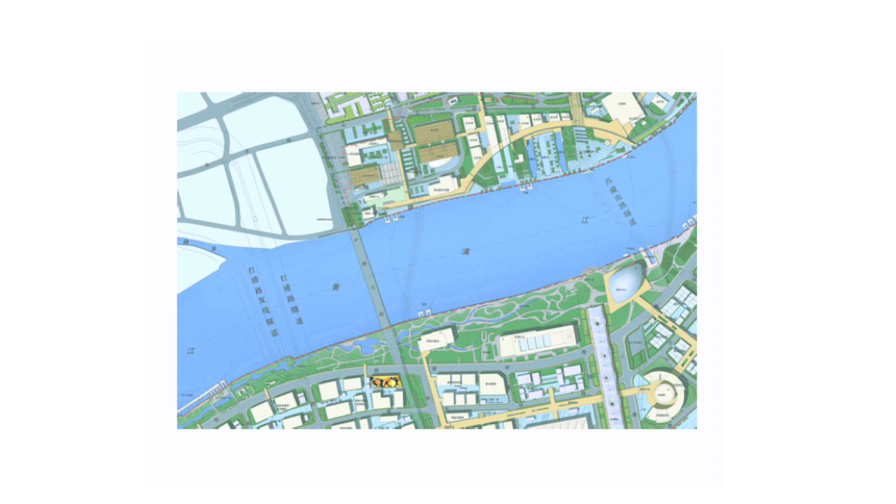Spain chose a spot just underneath one of the biggest bridges of Shanghai, the Lupu Bridge. In one of these small pieces of land, we had to do a pavilion which had to represent Spain in an expo which, for the first time in many years, would again be an expo of knowing each other. Because I think at the beginning of the expos in the last century, it was about discovering new capacity, new technologies, but here it was again a kind of meeting.

In China, in a place which was very curious about Europe and the rest of the world, and the rest of the world very curious about China, we had the task to explain Spain to a faraway country and to make it loved.

We decided, together with our team in the office - we have a very international team, people from all over the world, some of them are here right now - we started together to think about how to represent Spain. Most of us were not from Spain.

But we thought Spain was a fantastic place with a lot of energy, a lot of dynamism. We had a lot of topics on our table - flamenco dancers, the piazzas, the flowers, all these kinds of things. Then we took all the topics, threw them away, and substituted the building for a very dynamic geometry, deciding to introduce into the building a material which is handmade. In the past expos, there was always the use of a very traditional material from Spain becoming something else.

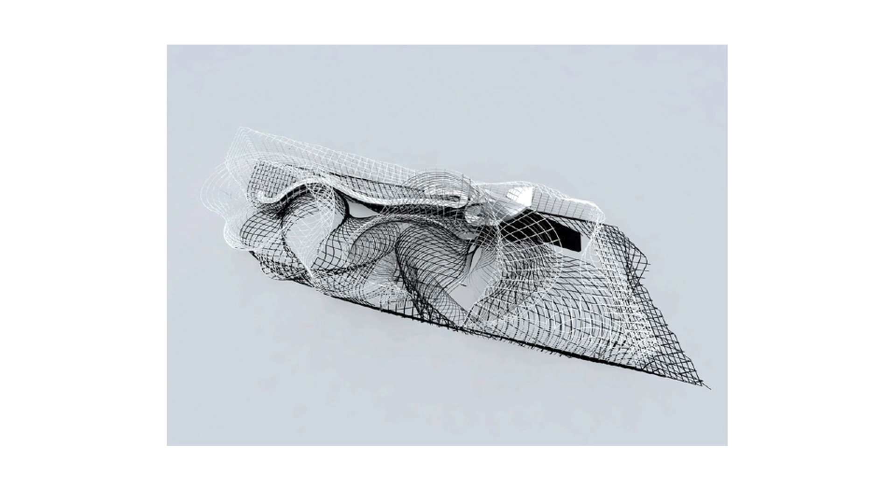But anyway, we thought that for sure we had to try to use something we could control a little bit. The geometry was very complex, but we could control it with this metal technique and with metal tubes, in a kind of net, a big net of metal tubes.

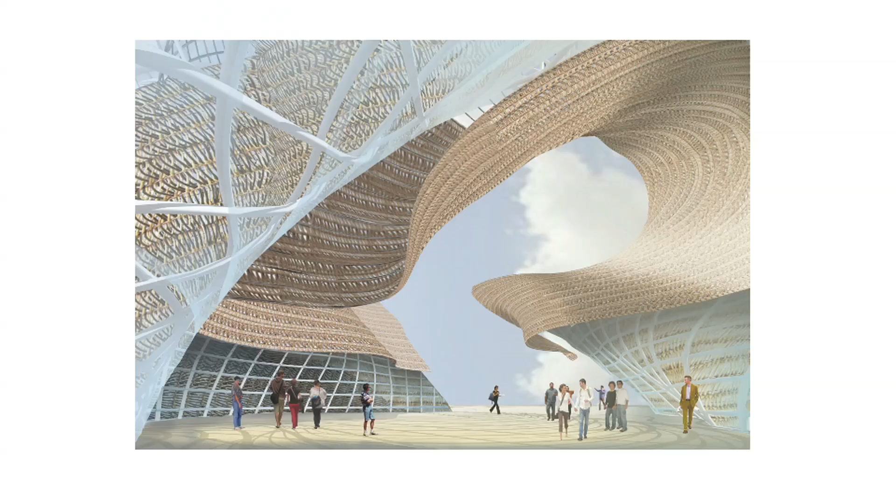Also, we had a fantastic structural engineer who is a friend, called Julio Martinez Calzón, and he's passionate about China, so it was a kind of double adventure.

We had this pavilion which would have a structure of metal tubes and a dress which would be done by hand. So we were thinking about the two things at the same time. On the metal tube structures, Julio had the ability to help us, and on the dress, of course, we had to be ourselves.

We were talking with artisans, but at the same time we were also looking at fantastic people like Miyake, who design dresses, and we were trying really to design a dress. And we did it inside our office.

Our office is one which also uses the hands very much. You see here, there's a very big place where we produce models - a little like you do, but maybe you have more machines to produce models. We are still very, very artisan, very handmade.

So we started to think about how to make this wonderful dress with every means we had in our hands. We were trying to understand how this skin could be kind of three-dimensional - we didn't want a flat skin, a flat dress on top of the geometry of the tubes.

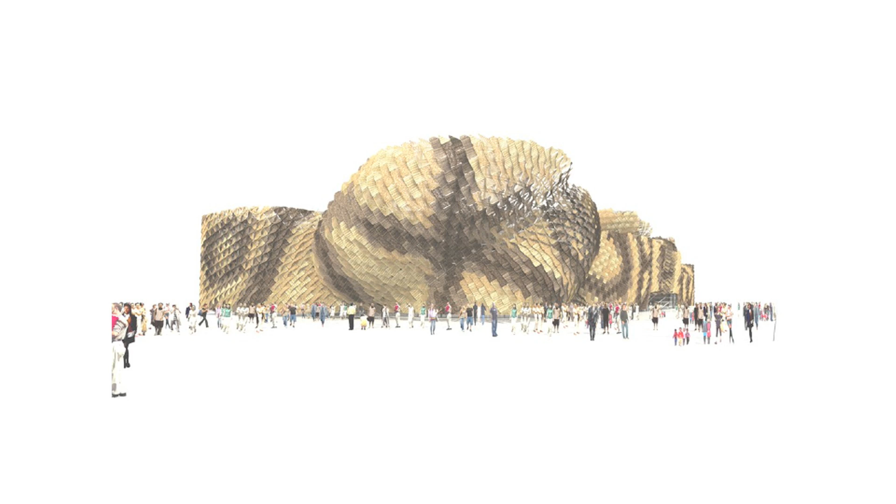When the Chinese people received the news that there was a kind of message on top of the facade, they became very angry, saying it's impossible to read it. And we were saying, okay, it's impossible to read it, maybe it's much better, because then you have the possibility to let the elements read it. So the sun, the wind, the rain will read it little by little and will change the facade during the 6 months of the expo.

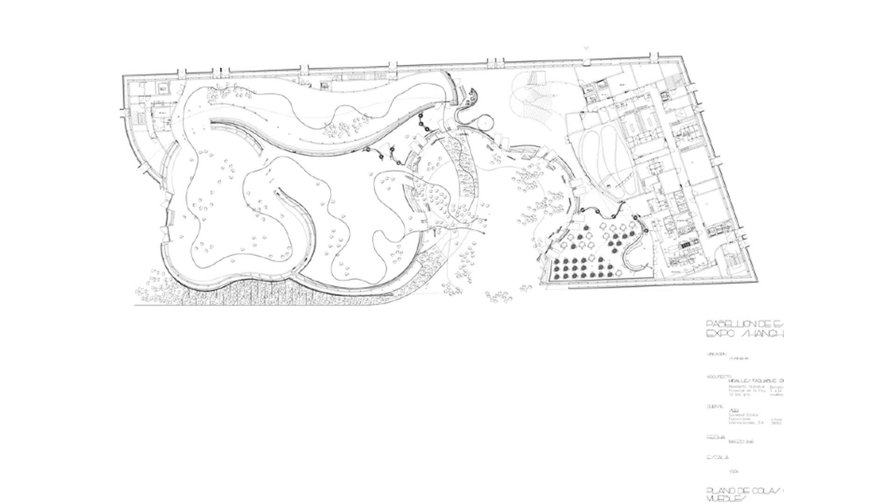And another wonderful material which we had to deal with was the people. Here you see finally the plan of the Spanish pavilion. The center of the pavilion is an empty space, a piazza, and from the piazza everything is happening. So these are the thousands of people lining every day, and the fluxes of people dividing, going inside into the exhibition, going outside, and then dividing more in the piazza, with possibilities to enter into the restaurant, the auditorium, the many offices that were there.

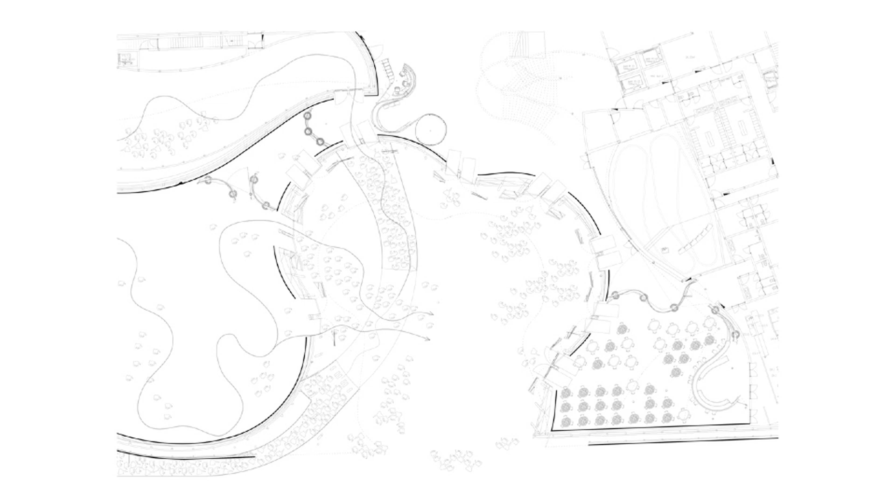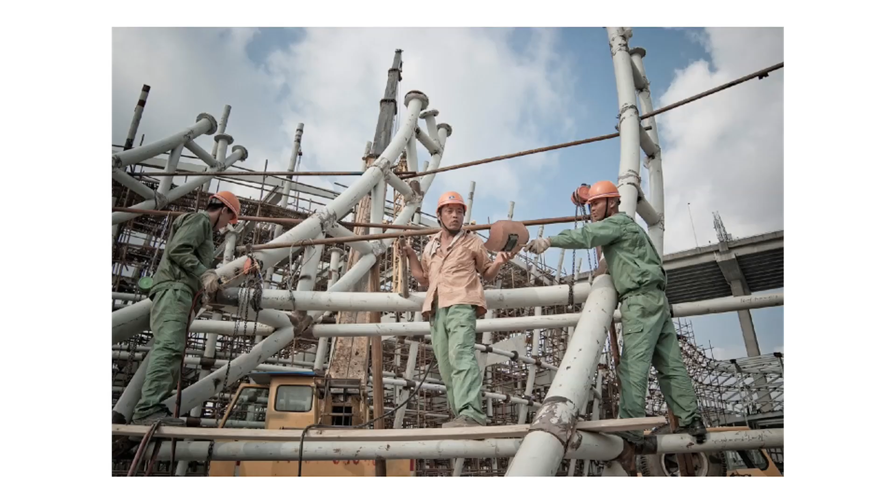The inside of the Spanish pavilion is a kind of flow, a continuous space flowing all around. But we had to divide the flow of people, so we decided to make furniture very similar to the geometry of the pavilion itself, which would not completely divide the building. It makes a division of people but lets the vision go through. We decided to use more natural material for these interior partitions, compressed bamboo, because bamboo is very Chinese, and we decided to be very Chinese, at least on the inside.

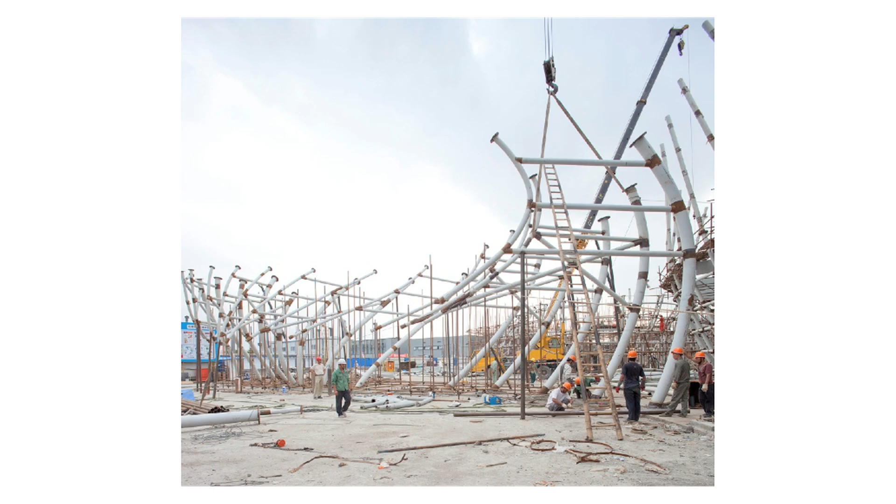Then the building side was a very fantastic adventure to us, really. It was discovering something very unknown. You have to imagine that at the beginning we were doubting, especially the client, about the Chinese capacity of building such complex geometry, that they were imagining building all the pieces in Spain and transporting them to China. Of course this was absolutely absurd.

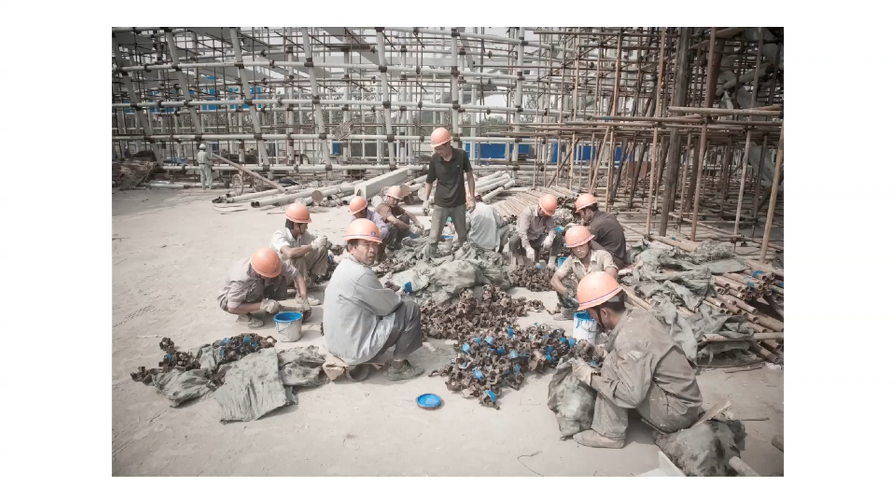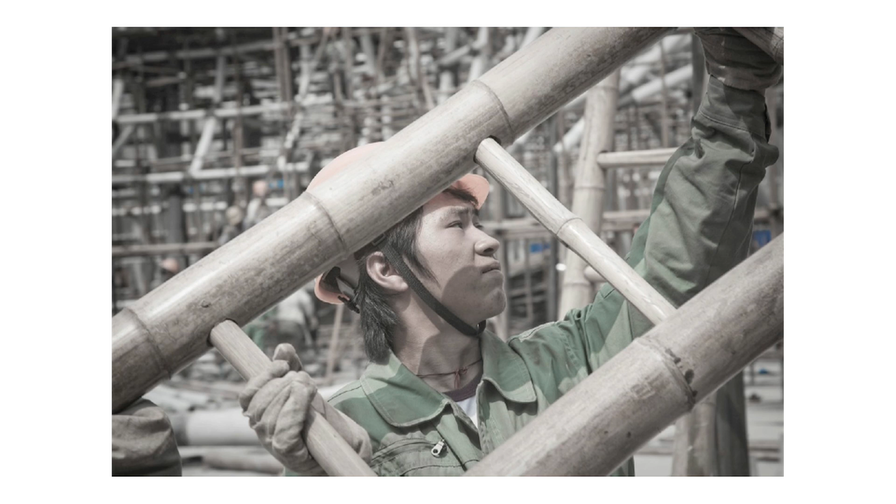When a little information entered into our knowledge, we understood that China was perfectly able to understand our drawings, to reproduce them with the same computer programs, to cut them, and also to understand the technique of how to assemble this very complex geometry, which you really have to assemble with a lot of care, considering also the deformation of the material. And what I loved more was this kind of images, how

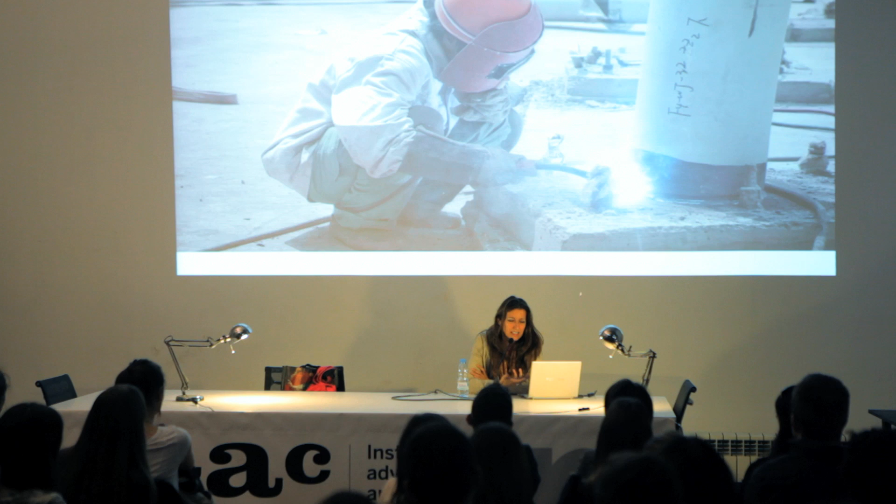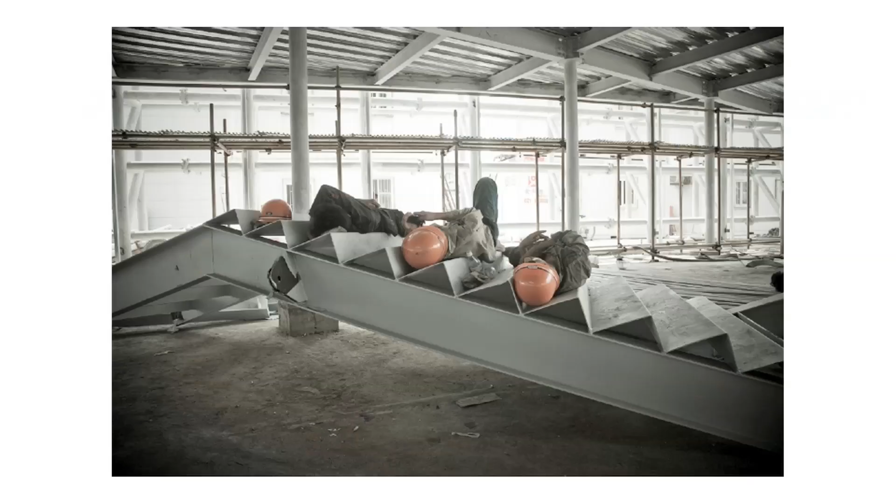artisan are the people who build also very big buildings in China. For example, here we have this bamboo ladder, but also everybody is using very easy tools, and for example the scaffolding is also bamboo, nearly the same thing that we were putting on the facade, let's say. And these capacities, I think it's really very nice, because this made me understand, going to a very far away country, that more than the differences, what interests me is the same things.

Humanity is so much the same everywhere. We all do a siesta, the workers work also in the same way. And for example, going back to wicker, this intuition that we had that wicker was worked in the same way in Spain and in China, here we had the alive proof, in this place — I'm sorry, my computer is very old.

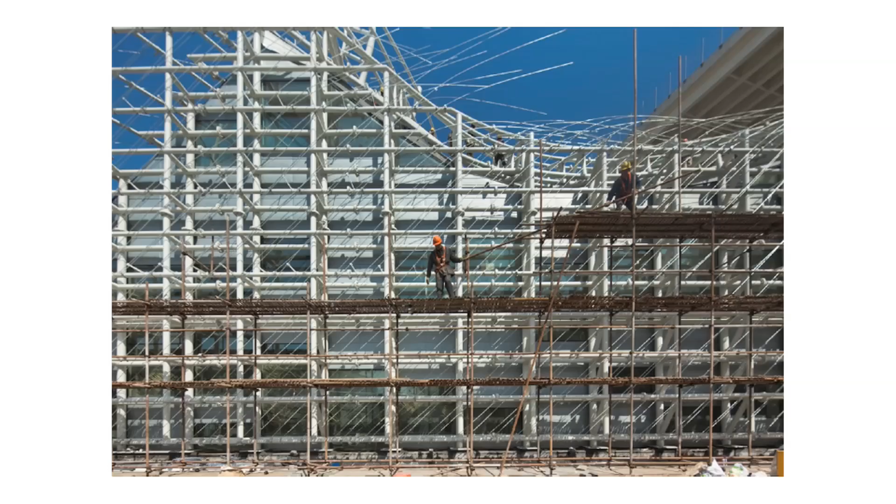And then the panels were arriving here to the building site. The building site is more complex. Here we already had the possibility to put the glass in the middle of the double layer structure, and also some of the opaque panels. And these lines that you see, this kind of hair, are in fact the secondary structure which is waiting for the panels to arrive on site.

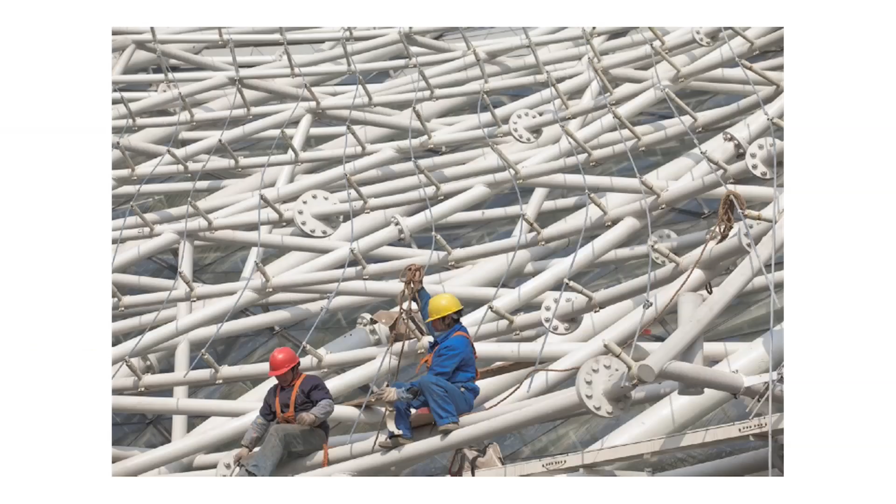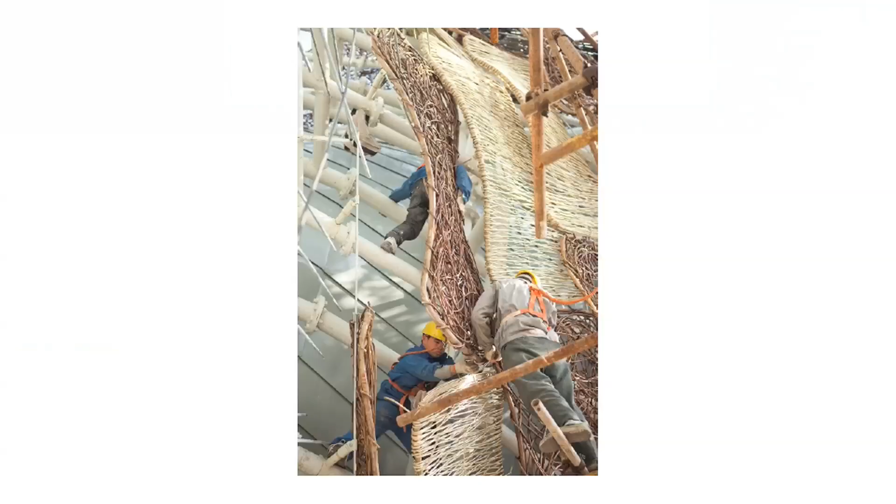What I love more of this image is that you see the panels are so similar to what's used in the real scaffolding of a Chinese normal site. So it was not a very big change. Trying to come from this moment where the scaffolding is there to this moment where something very similar to the scaffolding is going on top of the structure and becomes the facade.

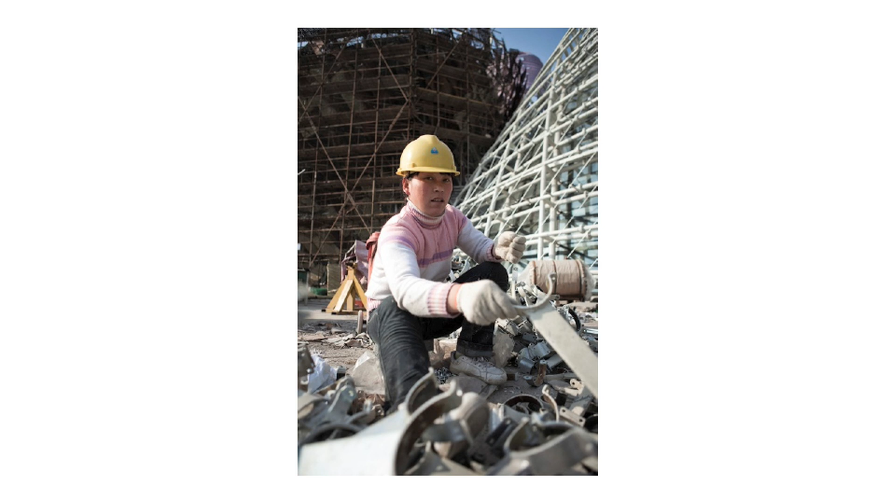Actually, each one of the panels was numbered, each one had a little label, because we were reproducing this very big drawing, this very big calligraphy. It was a mystery until about one month before the opening of the expo how this would actually be in reality. So this image is very important to me.

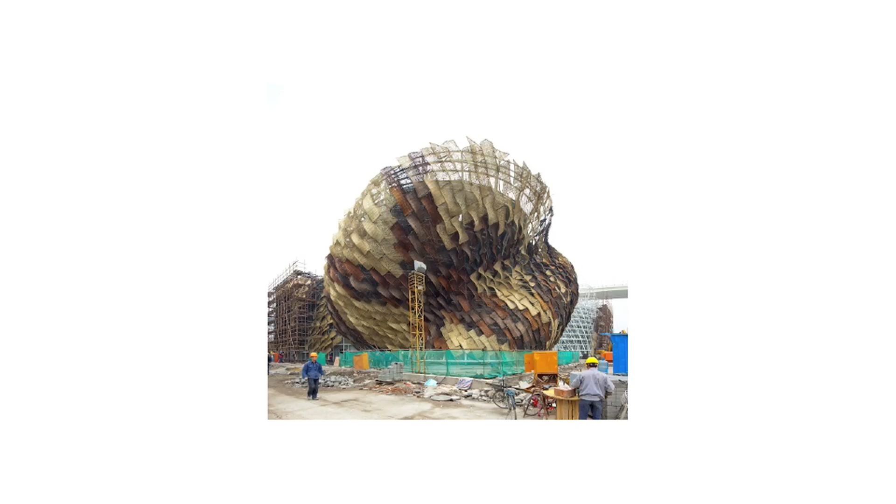The image before was the scaffold still there - I knew everything was going on, but I didn't know how it would look. And here, suddenly, we became more relaxed, because we said, oh, it's very strange, it looks like a render, but it looks better. So luckily, it's becoming something special, something different, something very similar to what we had been thinking, but in scale 1-to-1, this is becoming true.

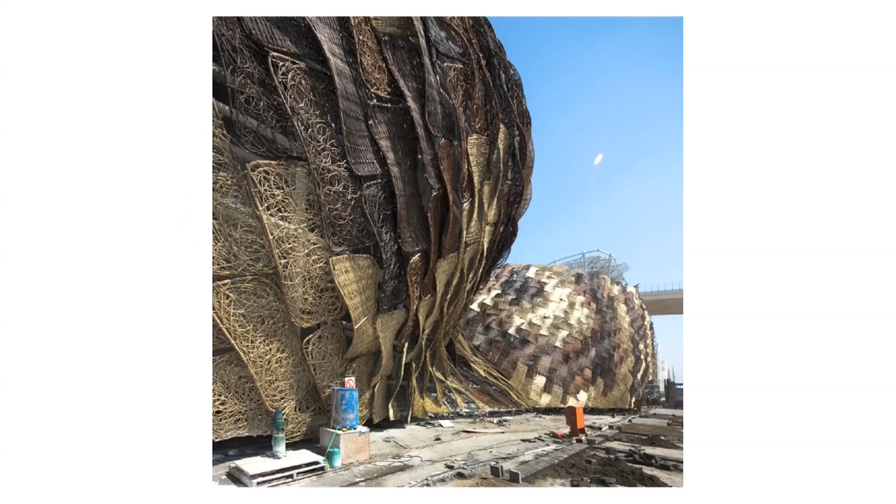It was as if finally this pavilion was becoming alive, becoming like an animal. So in a way, from that moment on, we were approaching our pavilion as if it was an animal that you know, that is domestic, that you love very much, but which has a life of its own.

And also the life was transmitting maybe to many of the people there. Because the people liked things, for example, like the smell of the pavilion. The pavilion had a very, very lovely smell, because with the sun and with the heat, and also with the rain, the smell was arriving, in a very, very artificial place like an expo.

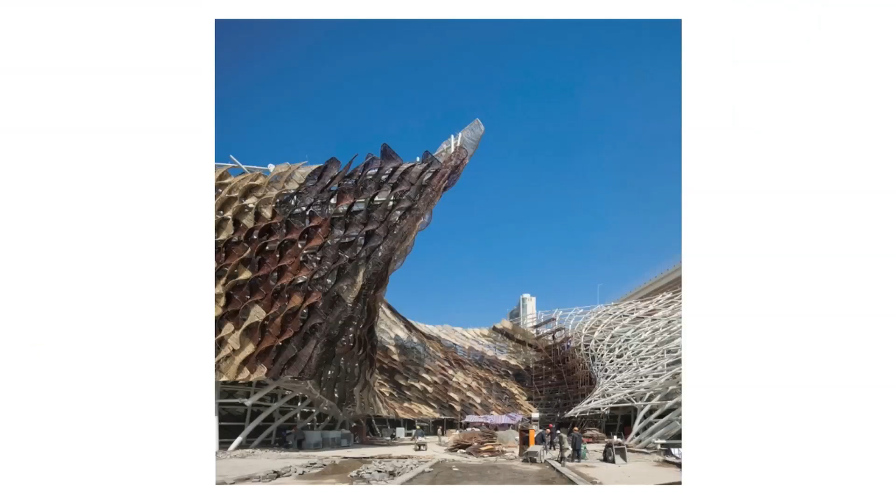This was a kind of a natural site. In a way, we usually work with the surroundings, and we like very much to mingle the buildings and the landscape. Here it was impossible, because there was no landscape in the expo. It was a very, very artificial site. But the wicker itself was working as a kind of a natural place, and also probably the geometry of the building itself.

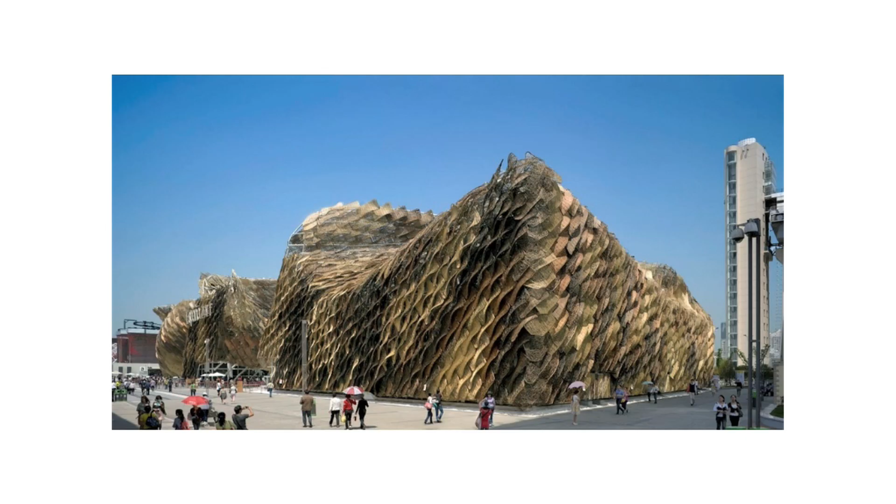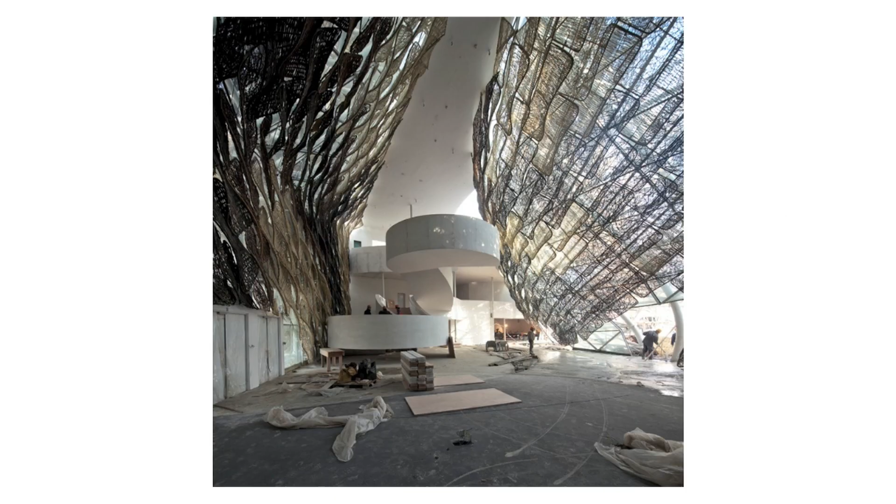It was like entering into a wood, or into the inside of an animal, or a forest - a place which is always different and always surprising you, but it's also giving a kind of cozy feeling. You like to be inside, and you like to get near to this living being, to this strange being.

So on the inside, there was this transparency that we were thinking from the beginning. We were really looking for this kind of light coming through this natural material and becoming like light through a wood. You don't have very much sun in Shanghai, but when the sun was clear, you had the shadows casting into the inside of the building, becoming really something very, very special.

And all this furniture, or these pieces, were designed in order not to interrupt this flow of the geometry of the building of the pavilion. And also it was very nice. I think the exhibition was one of the best.

It was really by chance that two of my friends were selected to exhibit inside. One was Bigas Luna, who did a wonderful film with sound. And the other one was Isabel Coixet, who did this very big, 5 meters high little baby, representing the future of Spain. So it was very lovely.

She's a filmmaker, but she refused to transform the room into a dark room for projecting films, and she used the same light to make her intervention the important one. So it was, in a way, like the big baby in the cradle.

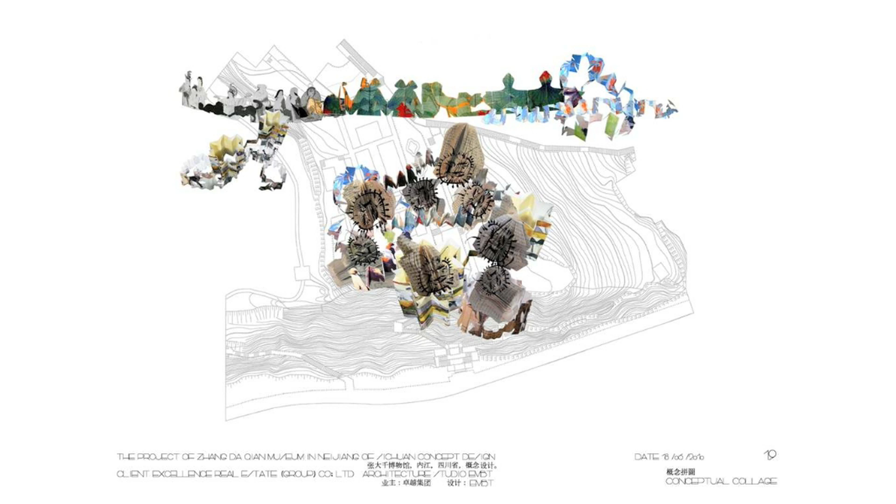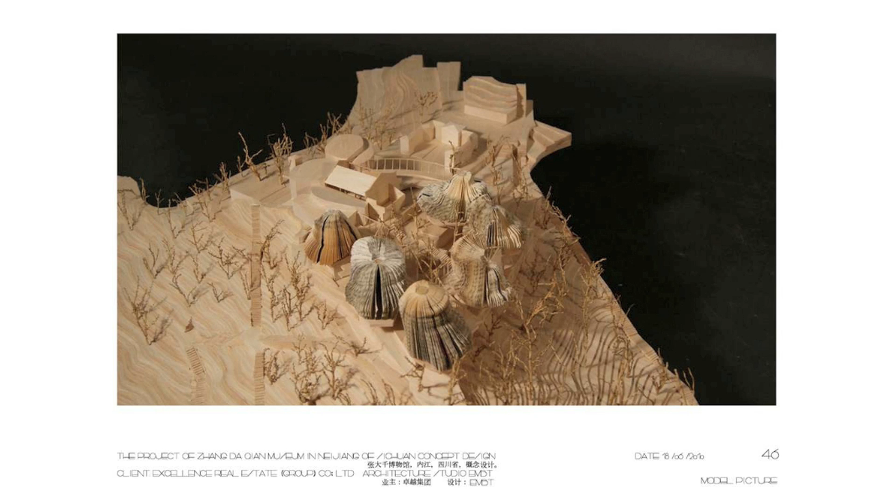And the elevation of these pavilions was coming from taking some of the figures from Zhang Daqian's paintings, or from Zhang Daqian himself, and we were trying to make this cluster of pavilions around the tea house and around the garden, because in fact this museum doesn't really have a collection, and they never told me what they would exhibit inside.

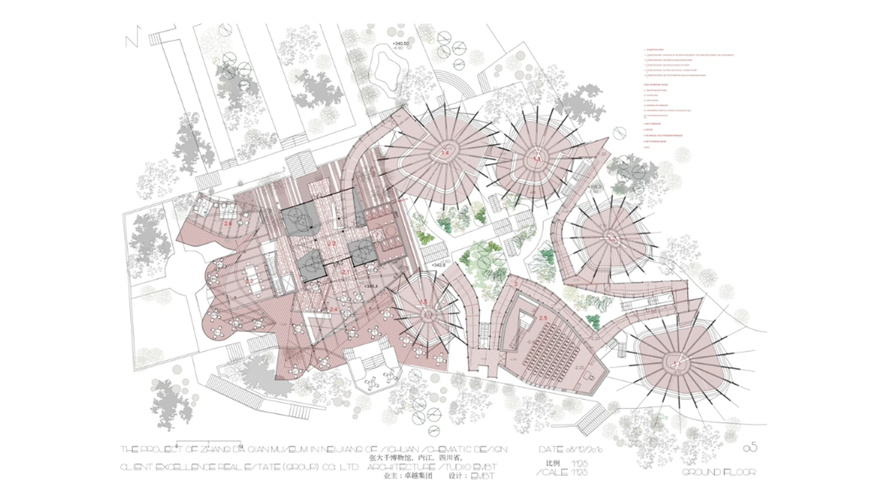So we thought that these pavilions could be good for projections, or also good to look inside—to have glass, to give the possibility to look at the inside part of this walkway, and to contemplate the garden, and to be in a beautiful garden that we will be able to recreate.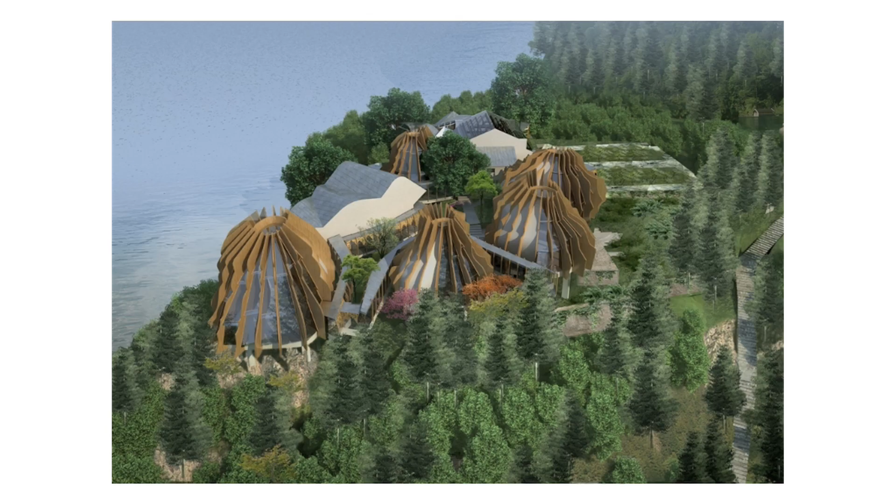Because now we have the daughter of Zhang Daqian giving us information about how her father loved to make gardens himself. He was a very good inventor—he was not only painting, but also inventing gardens, making his own pavilions, and cooking. In the region there are many of Zhang Daqian's recipes.

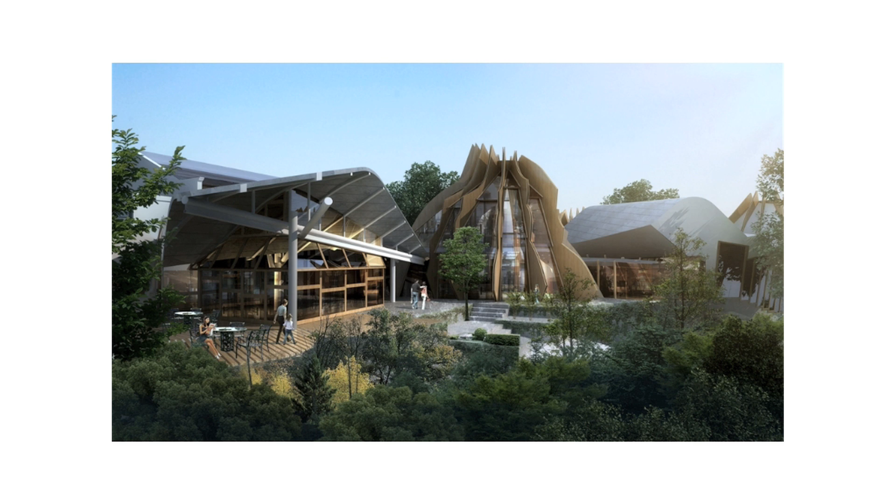And then we are trying now to collaborate with the city of Neijiang in order to make this place with no collection into a very interesting place where anyway you can have a strong feeling, a strong touch with this painter who was born in these lands.

And first of all, we had this meeting with rituals in China. Rituals in China are very, very nice, very strong.

They chose to place the first stone, which is fantastic, but then we didn't go on because the project wasn't ready and they were still fighting about many things. But it was chosen on a very magic day, 1/1/11, a day with all ones in the date.

We saw the display of people and colors, the architect introduced this kind of big party where there were things flying in the sky, where the politicians were the main people on top of a very red new podium. There was also the presence of folk art, with many colors going up into the stairs, really making the situation.

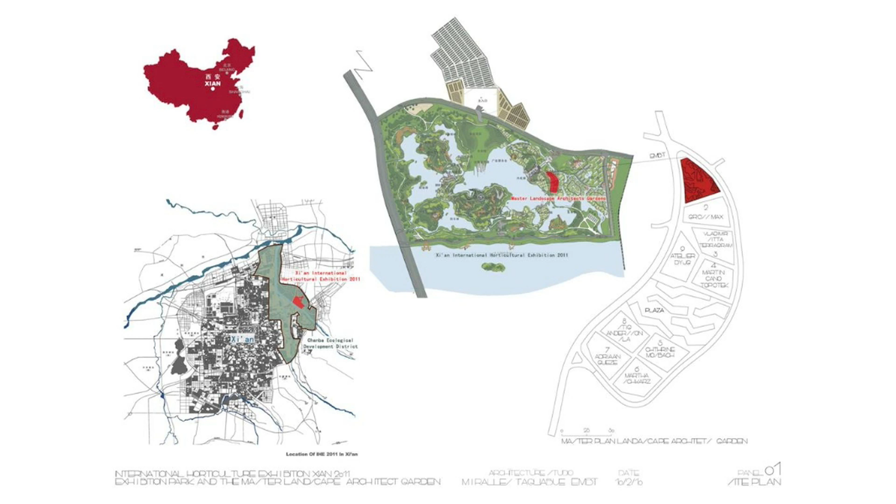This is a very small park, following from the expo in Shanghai. Someone from the garden expo in Xi'an said, you did the expo in Shanghai, why don't you do a little garden in Xi'an? It was another expo, in 2011.

We decided to continue this love we have for Zhang Daqian. We took one of Zhang Daqian's paintings and cast it onto the plot, then started to give some definition to the lines. Some would become little bamboo walls, some would be walkways. It would be a kind of labyrinth, totally done with natural material.

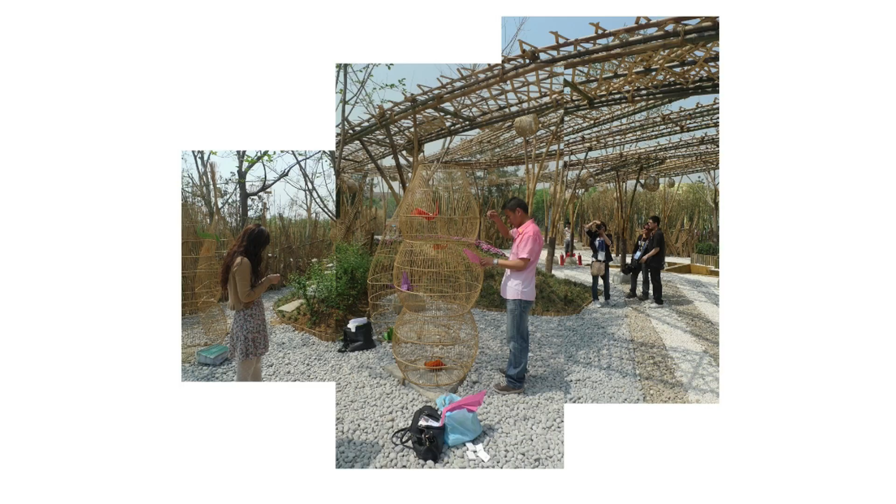This was very nice, but it was also supposed to have a lot of vegetation. Then we discovered that in Xi'an, vegetation is not the easiest thing to grow, you need years to have it properly established. So we accepted it would mainly be natural material, but the vegetation was kind of fake.

In order to introduce a little more color, we had these paper birds which were put into cages, and people played the game where we were there with these birds, putting them into the cage and then taking a photo of themselves.

Meanwhile, we had a very big project asked of us. I was surprised. One day we went to Shenzhen. They said, the same client of the museum said, we have to ask you something. I said, yes, what? Would you accept to design a tower 50 stories high? And I said yes.

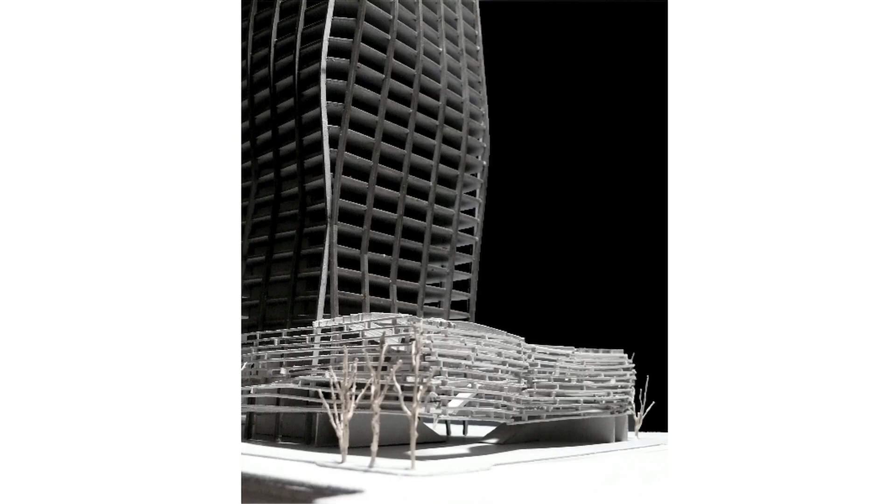Then they gave us this design. It's very strange, because in Shenzhen there are thousands of towers. To say a 50-story tower in Shenzhen is something normal, just a normal building. But we were very happy to give a special tower to Shenzhen, so we started to develop a different proposition for the client.

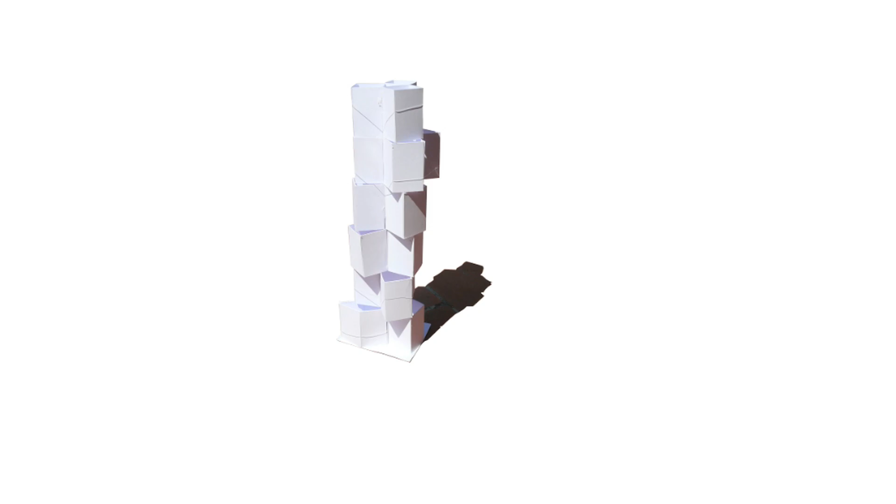The client had in his contract that he wouldn't sign until he had a scheme he would like very much. We thought it would be easy. They said, oh fantastic, very lovely, can you make another one? I said, so you didn't like it? No, we liked it, but please do another one. Okay, then we did another one. They said it's really beautiful, can you do another one? We started to worry a little bit.

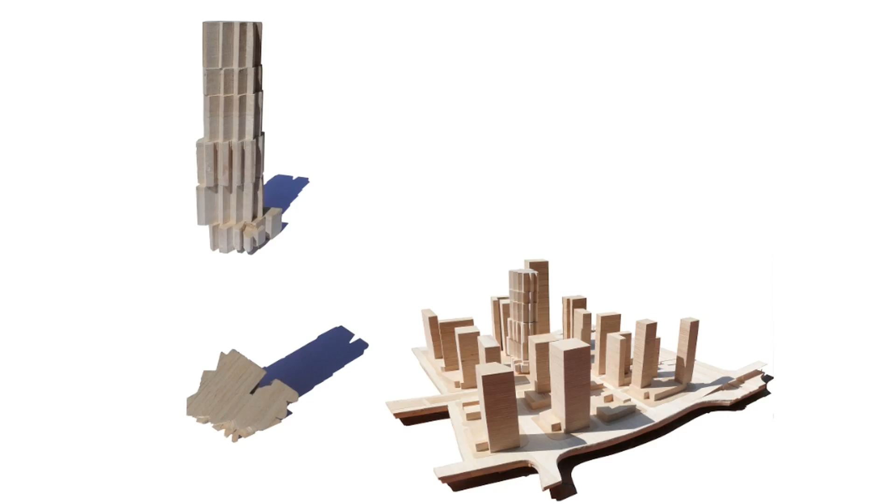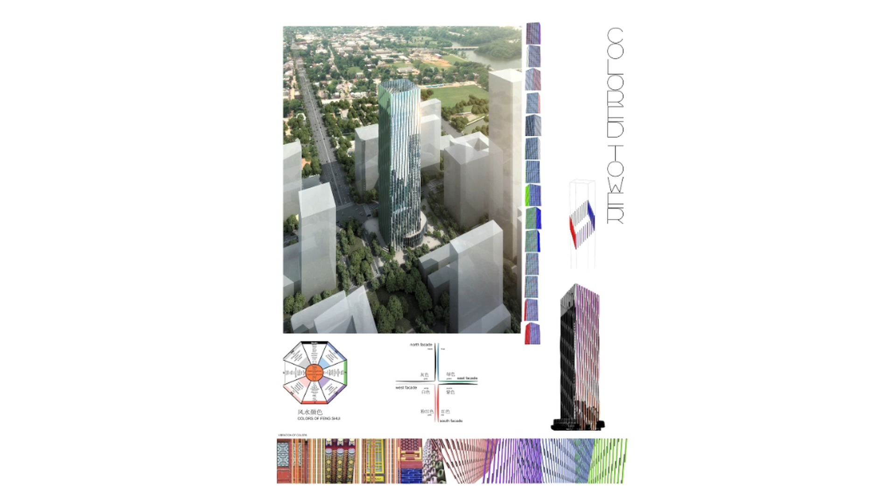Then another one, and another, and we started to realize maybe they wanted something more simple. So we made something with very easy geometry, but dealing with colors, and that was the worst. They hated the colors, thought it looked like a carnival. They were doing something serious. We started to be really afraid, because we were at try number 8 and they kept saying it's beautiful, but please do another one.

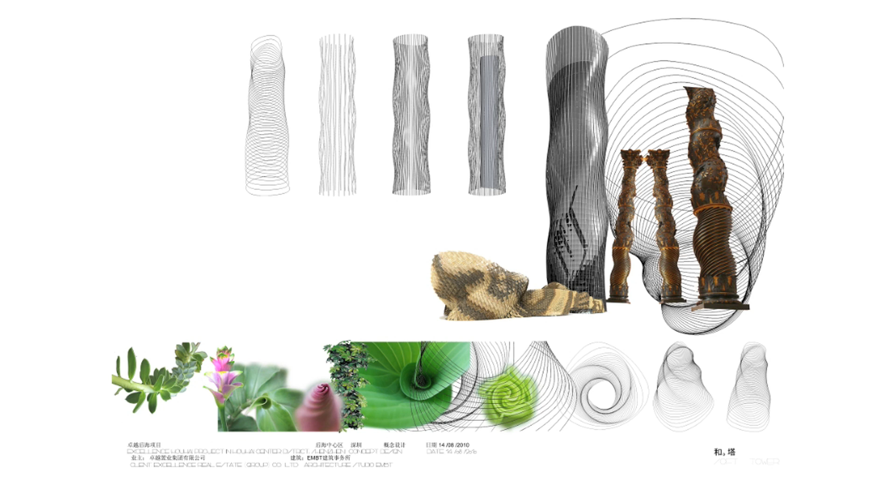Then we said, okay, they like the Spanish pavilion, we'll take its geometry and make it as a 50-story tower. This was more or less accepted, maybe two more tries and then we could choose. Then we had this one we called the Bamboo Tower. They loved the name, and the geometry was kind of special. So this apparently became the one.

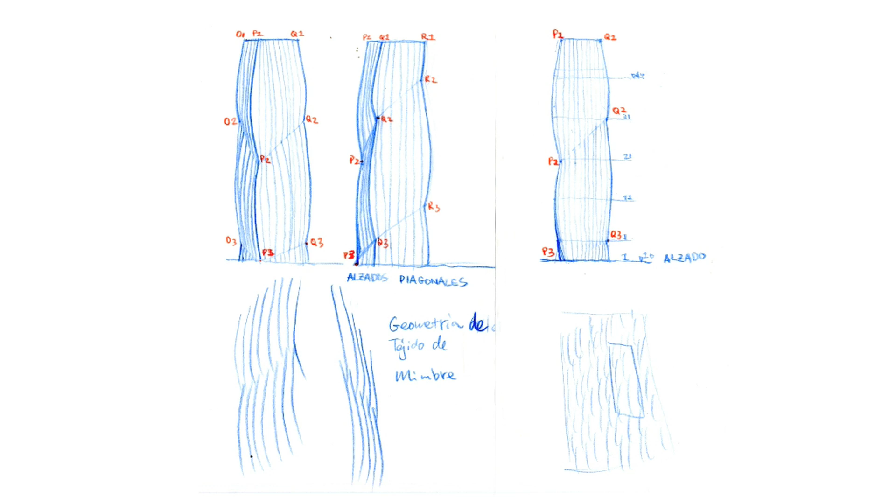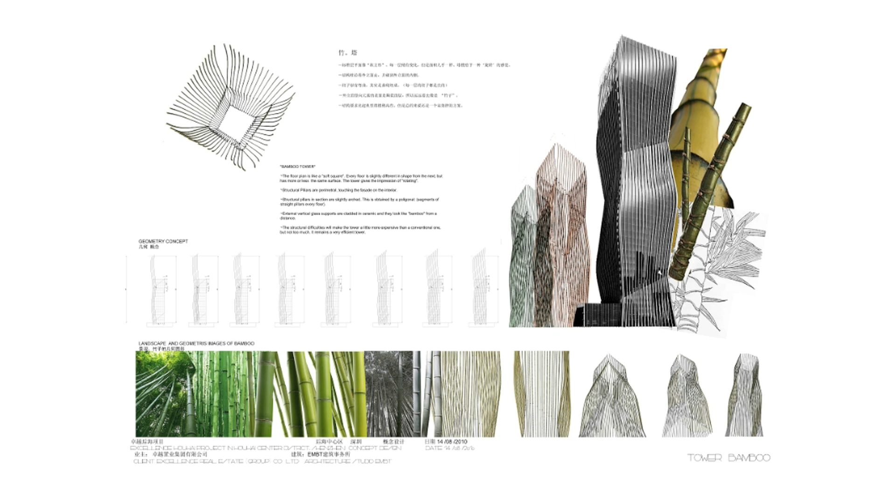We were more relaxed, and started to develop this geometry, which wasn't truly rotating, but making a slight difference between one side and the other. So the tower becomes something really changing from different sides. We developed this, and it became the one they liked.

We went into more details. How many pillars? How is the facade? How is the corner? How is the podium? The podium is very important because it's in a way the most public part of the building, and we were always trying to remember this idea of the bamboos.

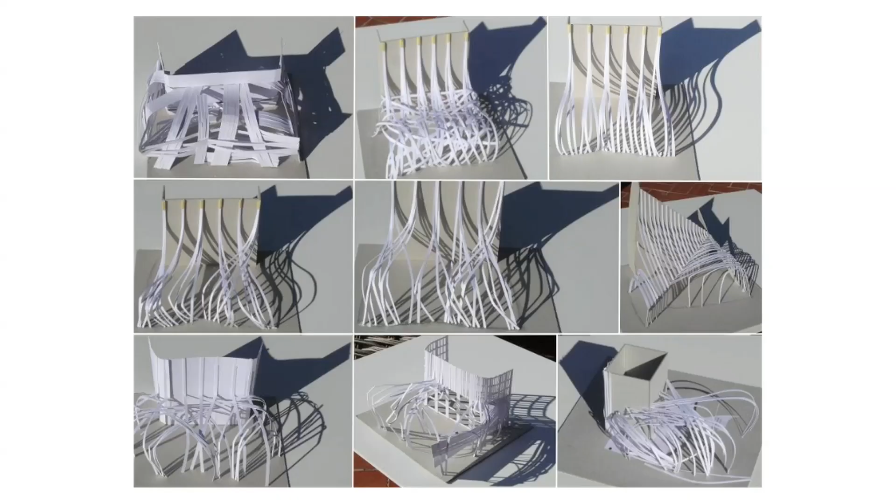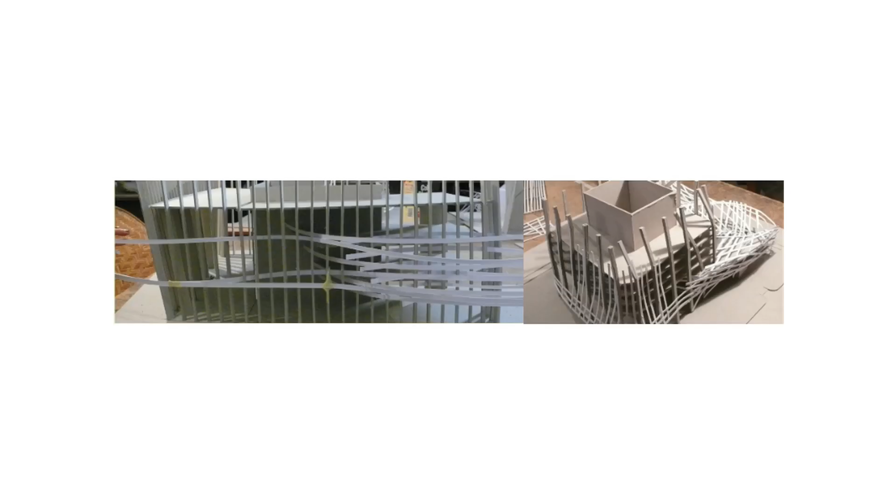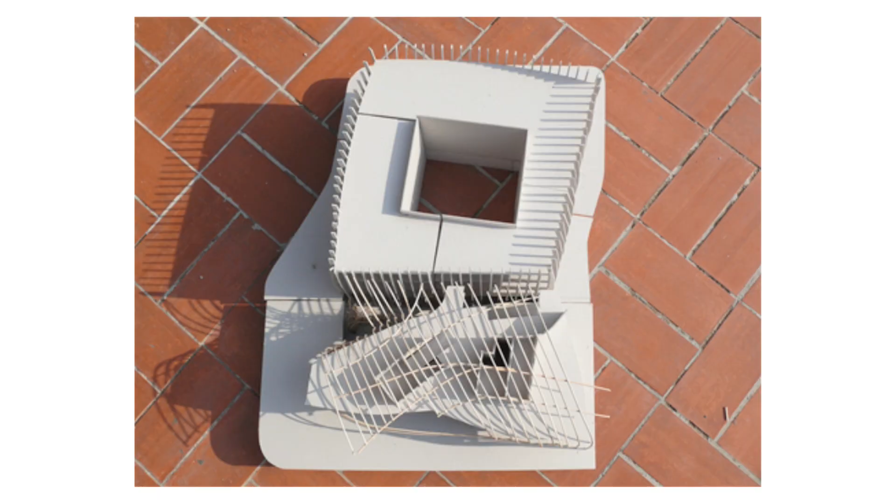We loved that they accepted the tower as the Bamboo Tower, and at least the podium had to maintain this idea of a bamboo structure that would go together and make the structure of the podium, also creating shadows and letting light enter through this structure, which then repeats a little in the tower.

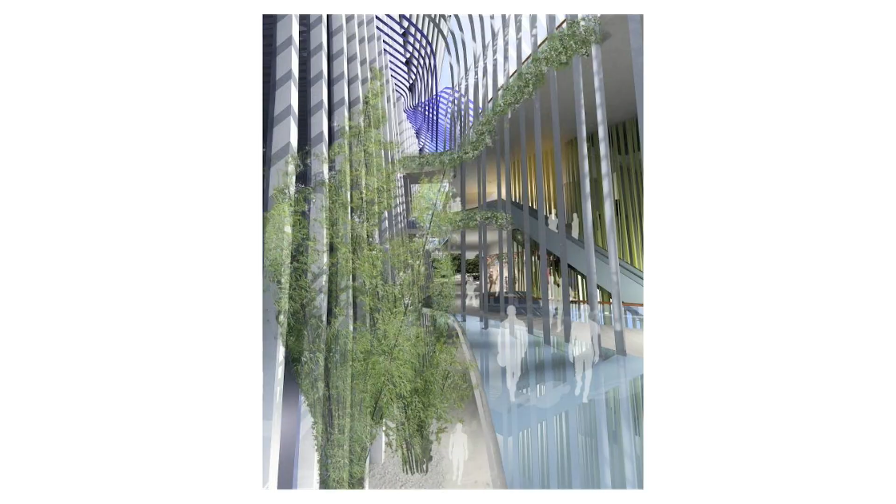So these are the renders. I don't usually love renders, but it's absolutely necessary to have a conversation in China with good renders. We accepted the fantastic renders done in China, more structure and less movement, showing the opening on the ground floor and inside the podium with this bamboo structure, very visible for everybody.

So we are developing that, waiting for the client to build. Meanwhile, we were doing a lot of things.

I don't know, now I take my watch out because I don't want to be too long, I never realize how long I speak. Okay, very long, so I will finish soon.

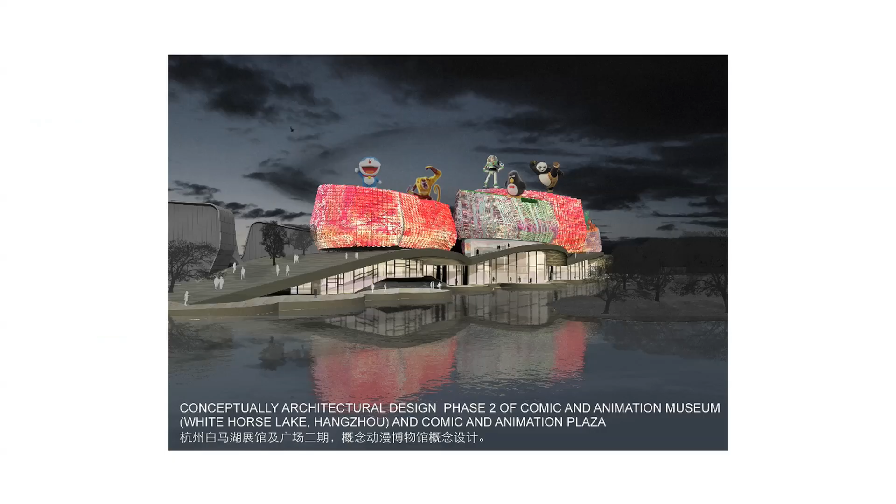This was another competition we did. Meanwhile, we did competitions for a comic museum. It was good because we did a competition for Disney Shanghai, and soon afterwards we were called to design in Hangzhou, on a beautiful lake, the museum for Chinese comics.

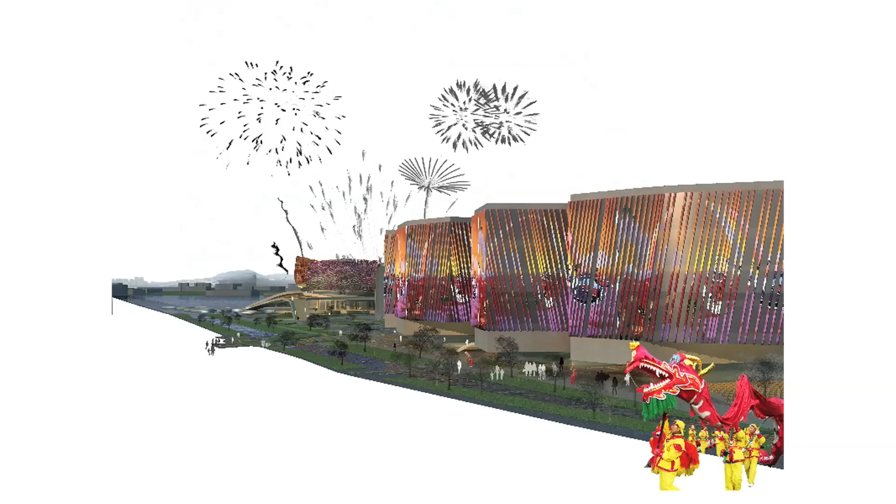We imagined a series of boxes with comics coming out, with comics inside, and the presentation went kind of okay. I think now we are very up to date to present this, because there were many buildings already existing, and I wasn't conscious who had designed this building.

Someone in the jury asked, aren't you afraid your new building on this new island is covering the view of these existing buildings? I said, never mind, these buildings aren't so important, anyway you can see them from the middle. In fact, the juror was the same architect, and nobody told me.

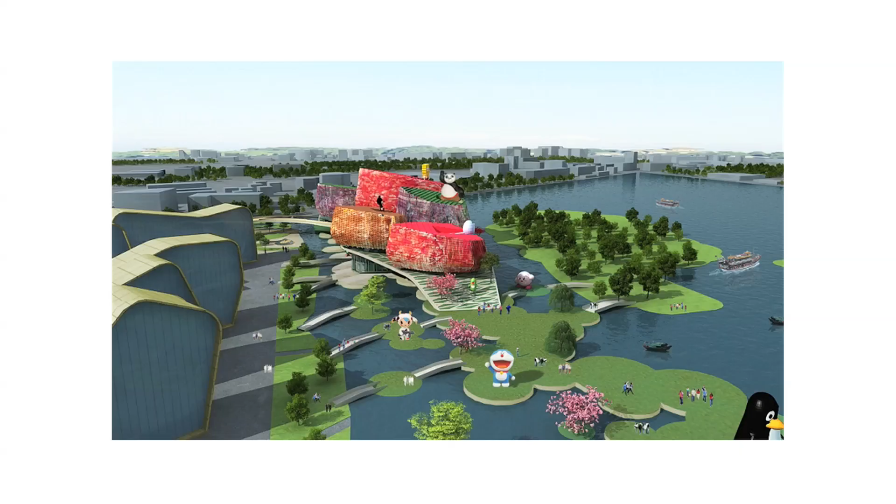We didn't win the competition. We were finalists, yes, but we didn't win. The architect is a fantastic architect who is now receiving the Pritzker. I really accept the judgment of the jury, as you always have to do when you do a competition.

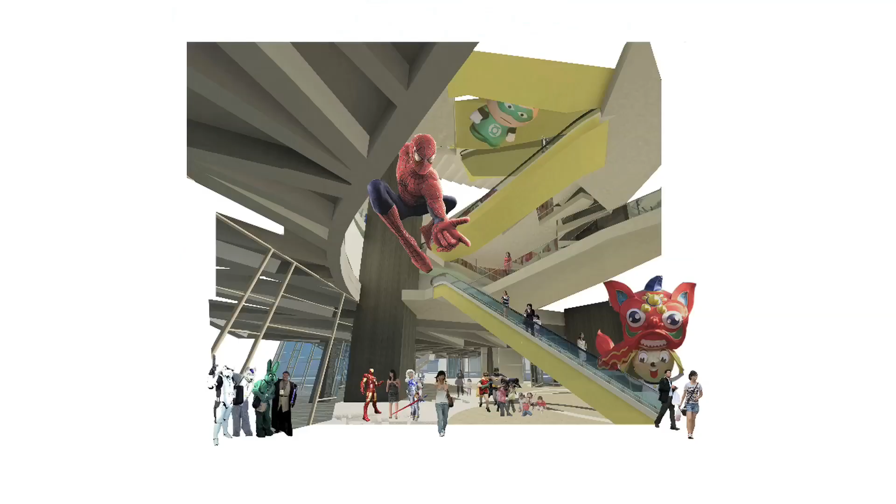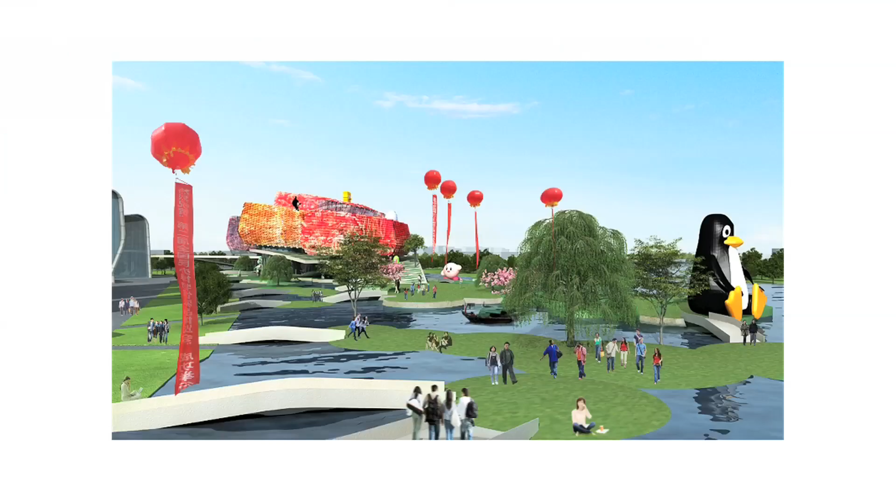A project by MVRDV from the Dutch studio was instead selected, and now they are fighting for the realization of this museum, which I think is a very good counterpart to what is Disney, let's say. It's a kind of Chinese possible Disneyland in Hangzhou.

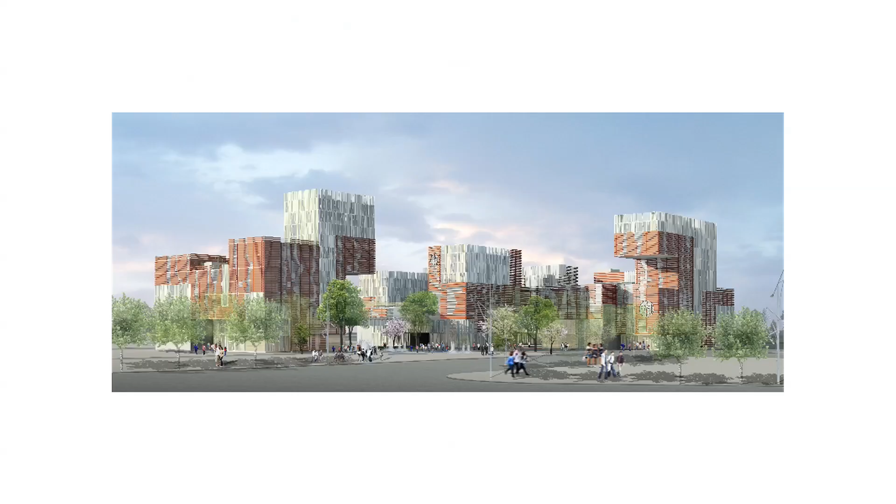So now we are on another project in Shanghai. This was also another competition, and here we were a little more lucky because we won it. It's a university in the middle of Shanghai.

Actually, we are in the middle of a new piece of city, designed with blocks. What the dean of the university asked the competitors was: please make these 3 blocks, which will belong to the university, as integrated as possible into the city.

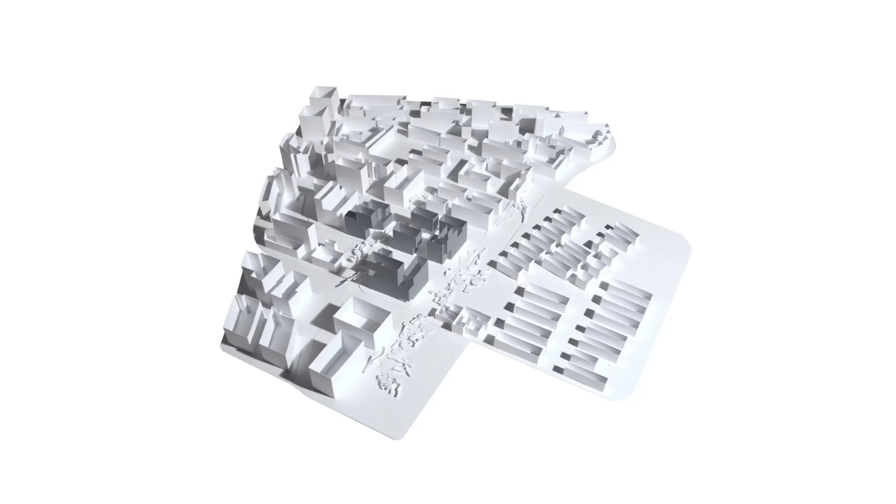So we tried very much at the beginning with these cardboard models to try to see how the volumes could work. At a certain point, we understood that it could be a series of buildings which look similar to one another, with similar geometry, with doors permitting entry to very different courtyards.

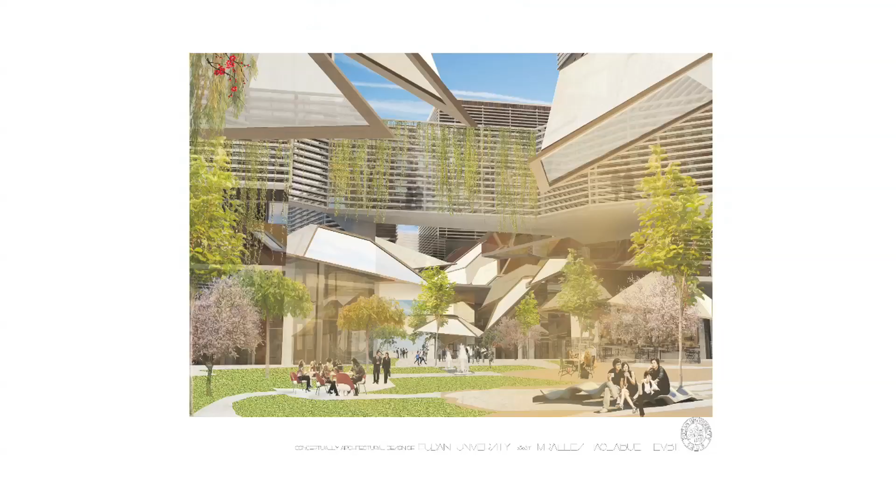Inside the courtyards, you had a kind of soft architecture breaking up and becoming a kind of landscape, so students and people passing by could stay in the heart of the courtyard and have the feeling of continuity of the space.

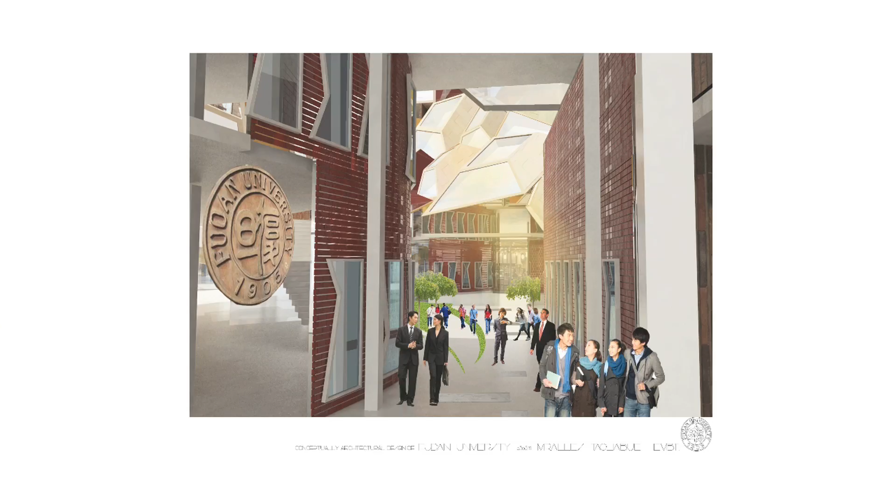So now we are really uniting all these buildings into an enormous block, uniting the 3 blocks with a kind of urban piazza at the upper level, and many doors making the flux of people going through.

But what I like very much is this idea that these 3 blocks of a major university in China will be very much integrated into the city and will really be part of the city.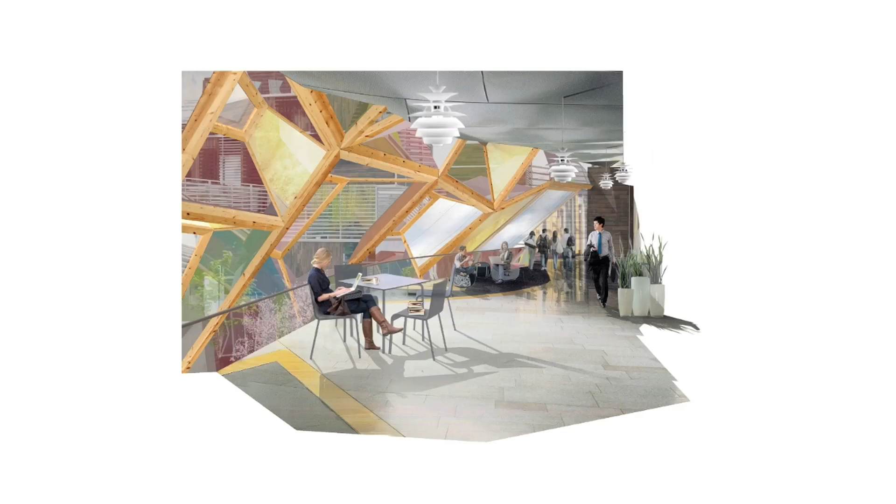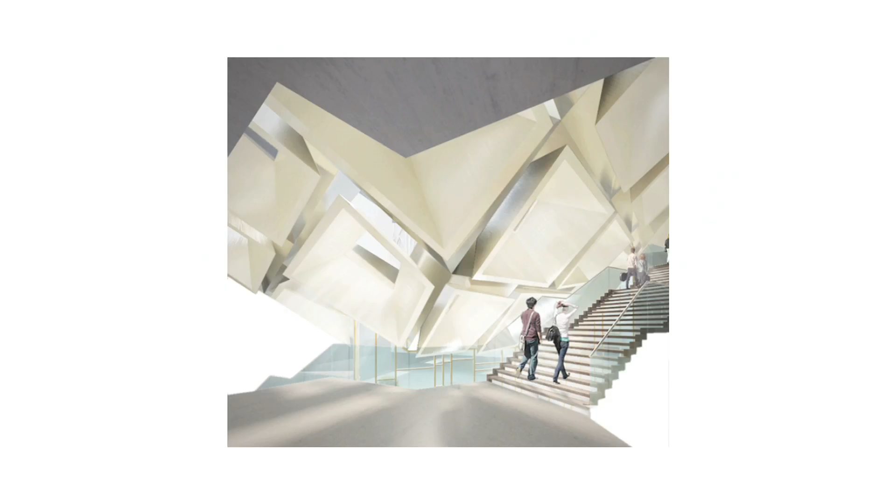So the main important places are these kinds of spaces underneath the roof, which go outside into the courtyard but also create interior courtyards where people can study and meet. I think nowadays these public spaces in a university are the places where you really learn a lot - maybe a little more than inside the real classrooms.

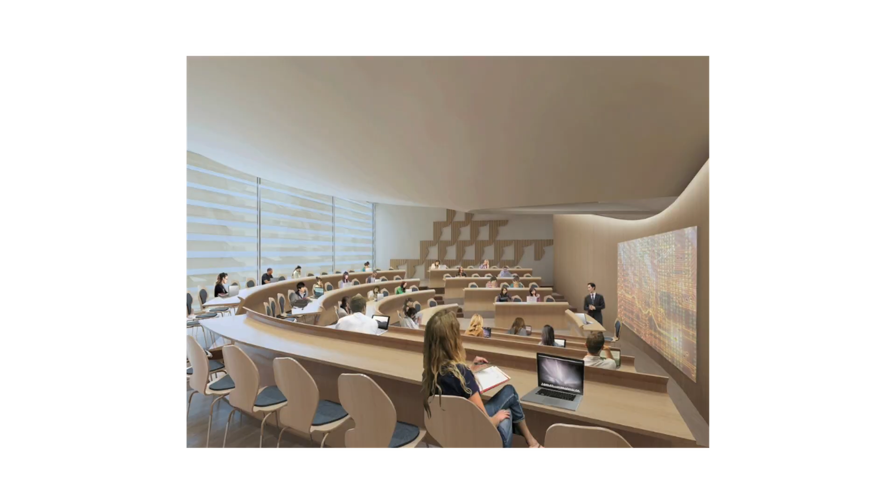I don't know, I have too many images, I think. We go fast - this is Hamburg. We are working in Hamburg. We are very happy - we did a harbor which is now dedicated to people.

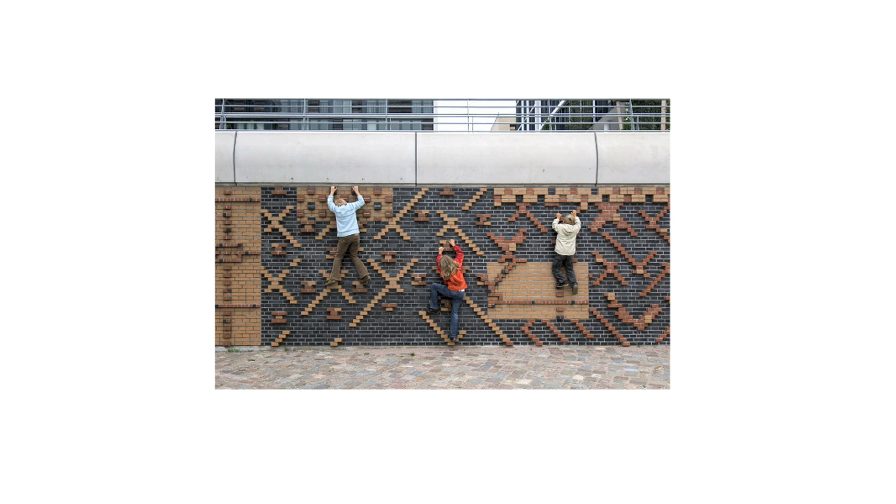They told us maybe that we did a too-much Barcelona space, but I'm very happy about these photographs, which demonstrate that when you give a good public space, people use it. So now the HafenCity in Hamburg is becoming more dedicated to people and is becoming a city, instead of an industrial harbor.

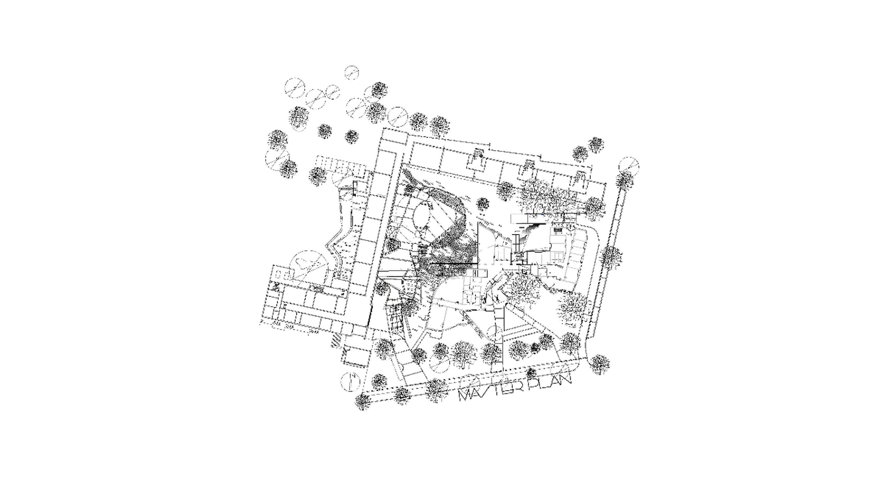Wait a second - and now the music school was extended. We had to extend it ourselves. You see, with this building here, we did a kind of brother to the existing school that we built. I don't know if you recognize that.

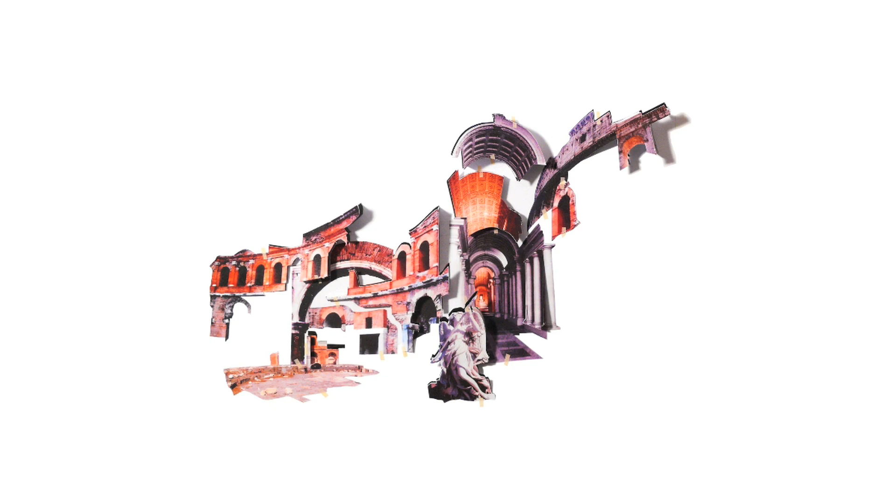That is a Renaissance building, one of the first circular buildings of the Renaissance, done by Bramante in 1502. It was really fantastic to have the opportunity to make an exhibition next to this place. So we had our friend painting, and we were thinking this exhibition would be Capriccio Romano. Capriccio is one of these fantasies that painters were doing in the past, using pieces of different cities and assembling them together. This wonderful Tempietto by Bramante could also be part of this exhibition, which was taking place here.

And I don't have now the photographs of the real thing. I took today the photographs we had in disorder in the office because we just came back a few days ago.

And I try to explain to you how it is alive, let's say, to prepare an exhibition where you don't really know how the result would be. Here we were...

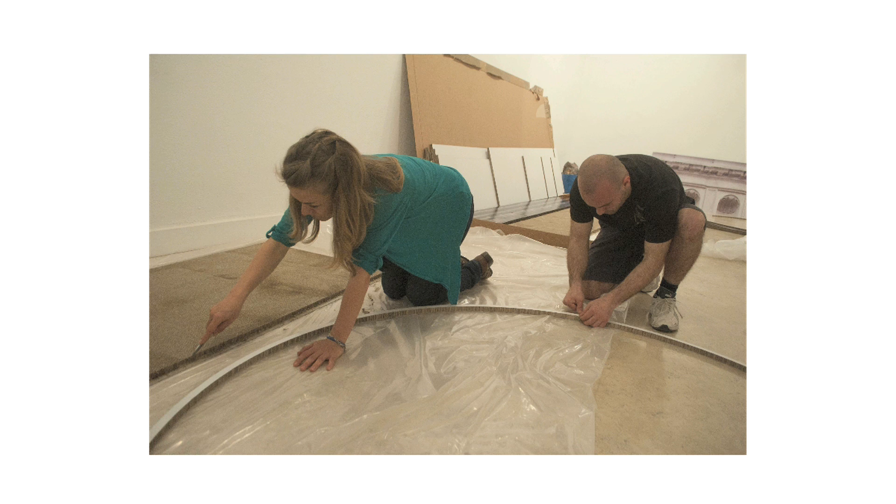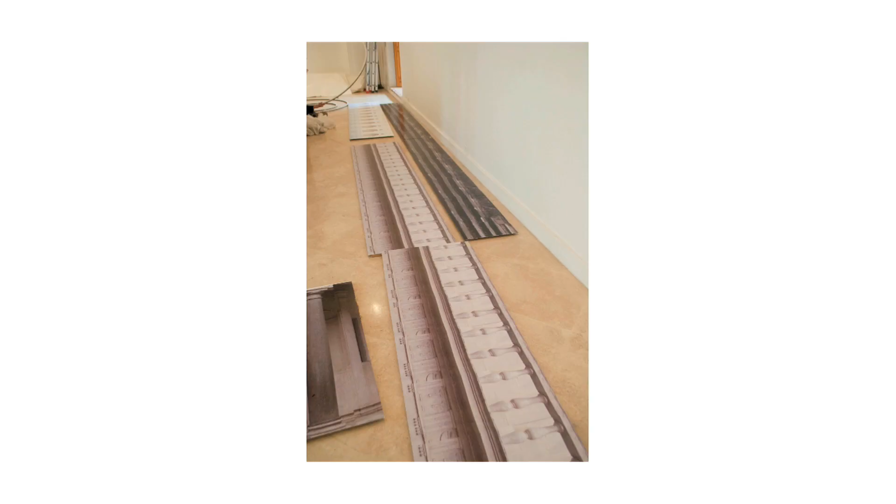putting in place this kind of collage in scale 1:1, with different pieces of Rome fragments, and also some pieces of the Tempietto, which was on the next courtyard. So the people would enter inside, see the Tempietto in reality, and then coming to the rooms and see the fragments from Rome recreated in a kind of collage 1:1 by us, together with the paintings of our painter friend who were painting Rome without looking at Rome.

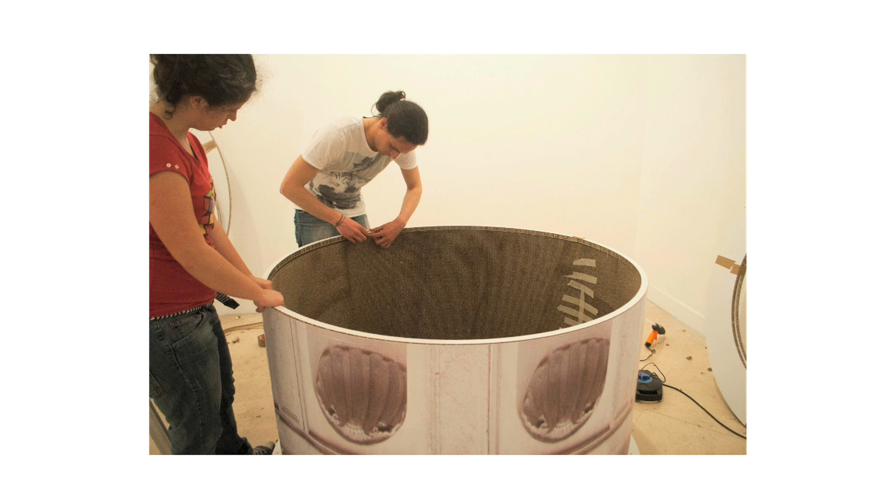So here we have this montage. Making this exhibition is really fantastic. You need a lot of energy, you need a lot of people, but it's also very energetic, because you really see the places changing hour by hour. Everybody's working, making this kind of reproduction of the Tempietto.

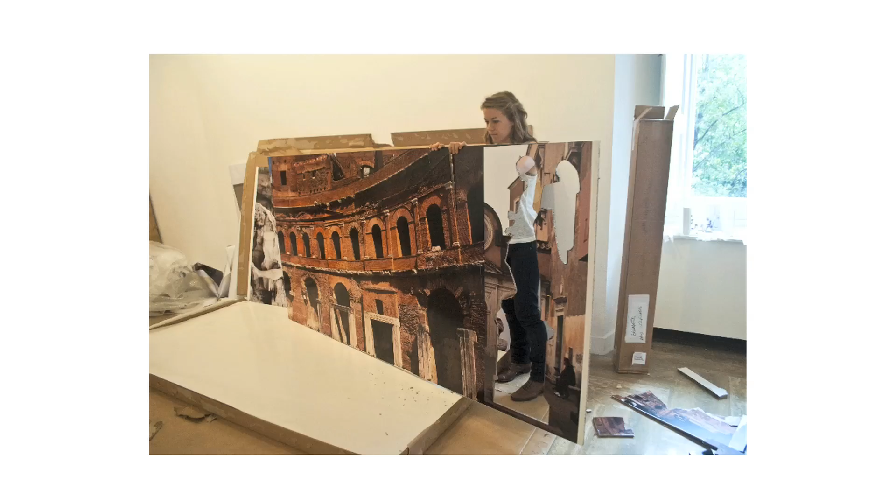The different pieces of the Tempietto are recreated in different cylinders, so that you have a perception of the building in a different way. And also some pieces of Rome are in kind of collage 1:1, which is then becoming useful. It's becoming like a bench or like a table or like a place where you can put your glass, and then Rome is becoming something like a very, very domestic landscape.

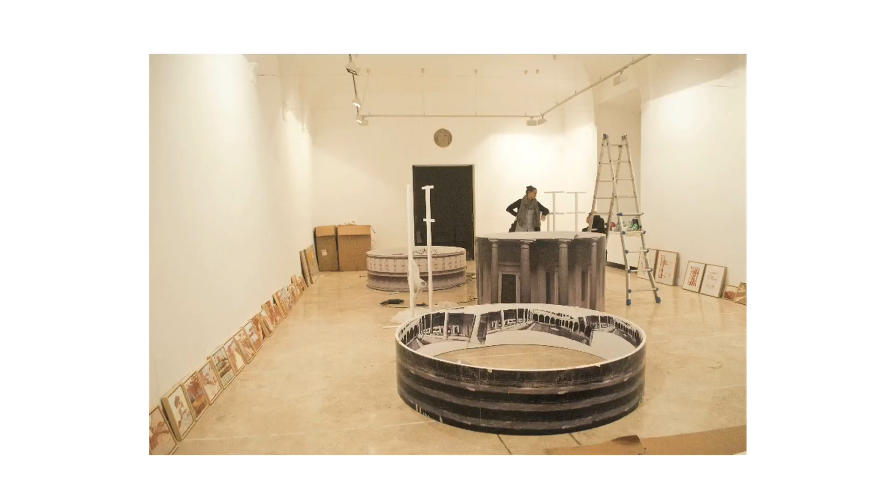This was our effort in doing this exhibition. So also together with the domestic landscape, pieces of my own house went into the exhibition, making clear that all that we were doing was trying to make Rome, which is sometimes felt as so monumental, a little more familiar, a little more domestic.

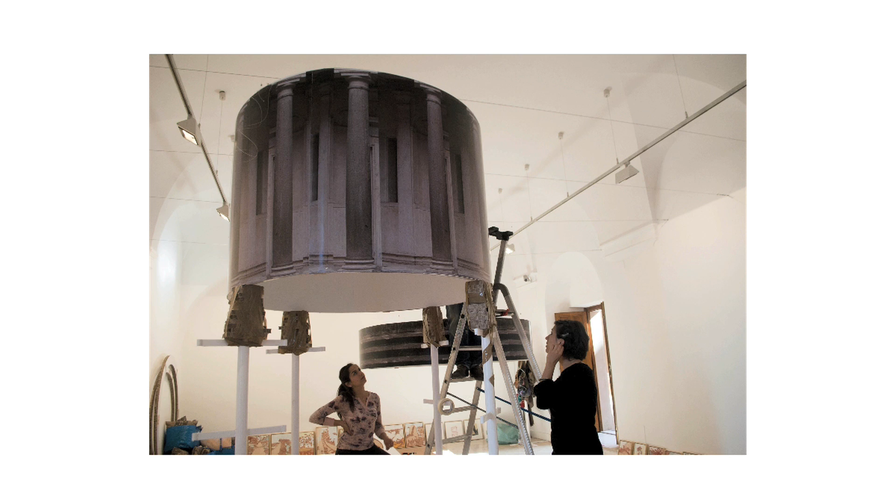So here are the paintings and the pieces trying to go together, hanging and welding, a lot of things. I have a lot of images because I didn't have the time to select them. It's just everything that we were shooting, and then the fragments of the Tempietto going on, and then some other fragments of Mercati di Traiano taking place, and then you see all these fragments going together with the little paintings.